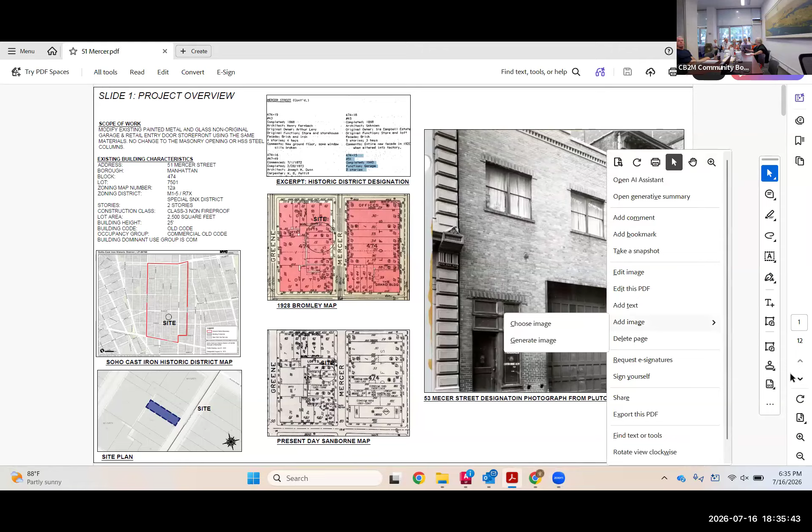Okay, well this is the present day building, right? So it's still a two-story masonry building. Everything's the same, masonry openings are the same. It used to be off-white. Before that it was Montauk Sofa. During the two time periods, quite some time, maybe they were there in about 2004.

Excuse me, as we're going forward, this is unusual. You showed the designation picture and then the present was different. Was there an approved alteration in the meantime? Yes. Okay, let me bring that up.

Let me go around a little bit since you asked, okay? Let's go a little bit into the history. It was a 5-story building, okay? And then there was a fire. Even in the photos, the fire is taking place. It was replaced by a 2-story garage type building. There's some of these typical ones left at the end of the presentation, I'll show you.

You can see all the way on the right, the top row, Montauk Sofa, an altered garage door with glass in between - presumably some part of the old garage door and some sort of infill, like an aluminum infill door, a retail door in the garage, in the midst of the garage door.

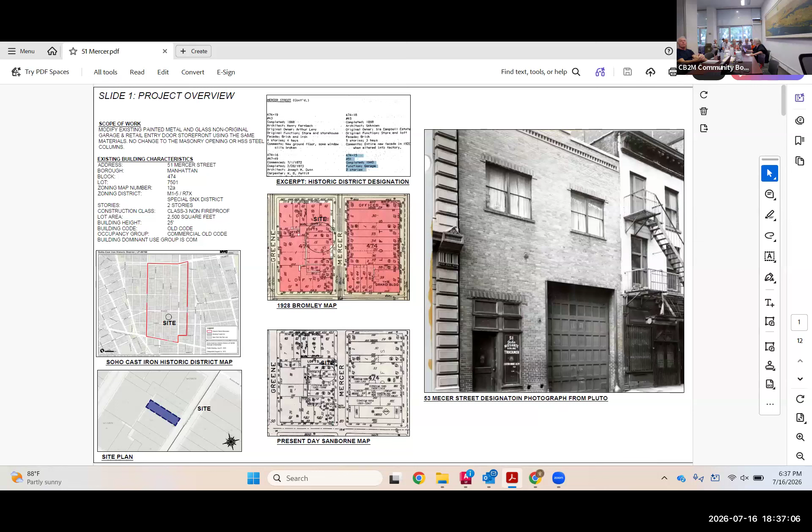Okay, this just graphically shows the progression all the way back to that designation photo on the left, in plan and in elevation. You can see the original designation elevation with the true garage door and the separate entry to the same space. Then you can see there's some sort of change, maybe the conversion of the second floor, and that door on the left turning into the second floor access.

A door put into the garage door that's modified with glass. Then there's the change to when it was either Montauk Sofa or off-white, where it became a steel and metal black glass garage door with a separate aluminum door on the left side here and a transom panel made out of aluminum. And that brings us to - can I go to the drawing all the way on the right?

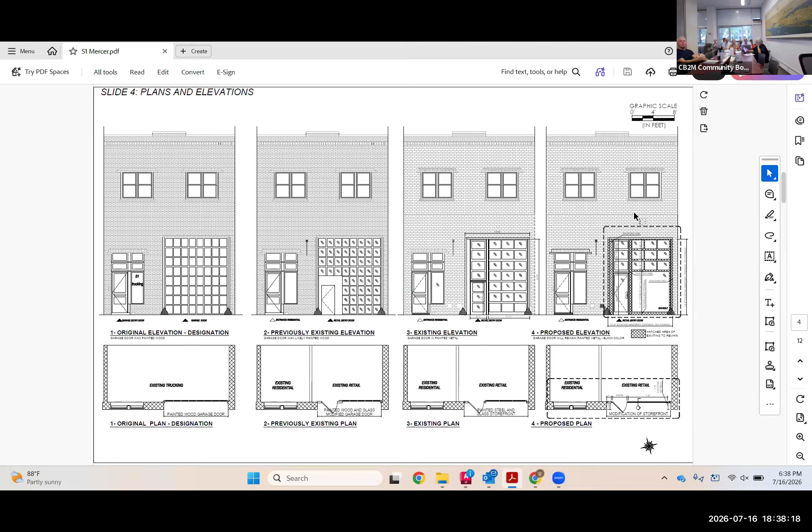That's the current proposal. So the current proposal is more of a modification of the storefront in between some of the pieces that will remain. So it's really not a replacement, and I want to highlight that.

I'm going to just zoom in so everybody can see it really clearly. I'd love to hide these tools. I'm trying to go, okay.

So the areas that I have designated with this crosshatch are areas of existing to remain. What are these vertical pieces? They're steel columns, okay. And then this rectangle is a big steel door.

What I want to do between the two steel columns on the left is take out the transom that exists and the door, and make a new transom door configuration.

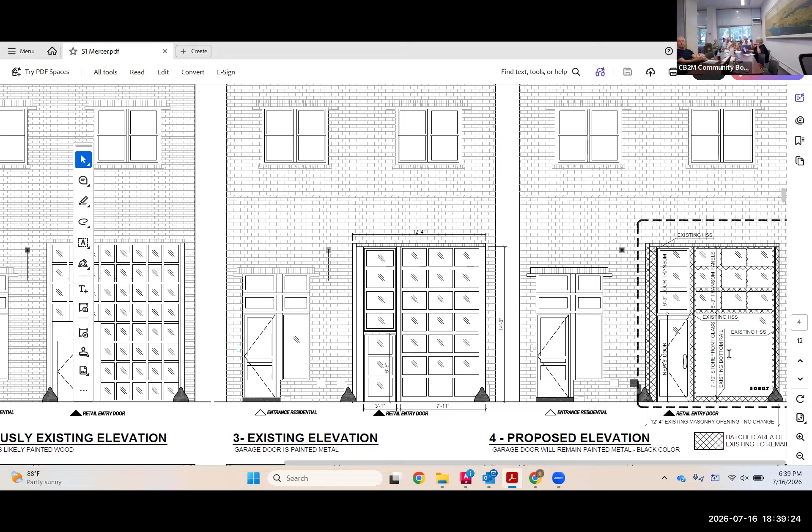And what I want to do to the garage door on the right is modify the garage door to make a store window transom kind of design orientation. So instead of this, let's say, 24 window panel storefront, I want to do a 12 panel over 2 panel storefront, which isn't so atypical in the district.

As you can see, in the detail through the transom and door part, I'm making fewer glass panels, a taller door. And on the garage we're doing the same - fewer glass panels, but it's more like one big panel over a multi-light transom. That's something I have above the door, and that's something I have above the garage door. The garage door is staying, it's just being modified, okay.

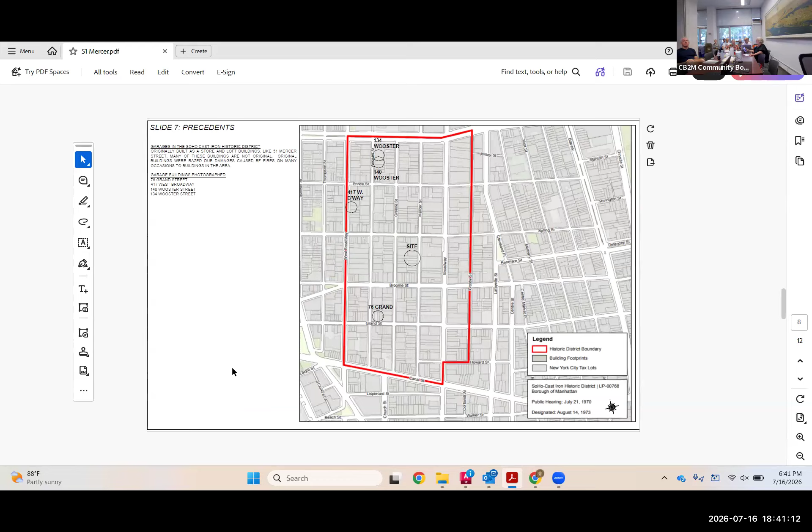I've got four examples of other garages that have a similar history. This is the Deitch Gallery around the corner on 76 Grand Street. It's actually pretty unchanged, so there's a lot of examples of things that are unchanged and things that are drastically changed. This is one that's pretty unchanged.

Okay, if you would leave up the one that shows before and after as a rendering, I think that's best for us. Okay, let me do that.

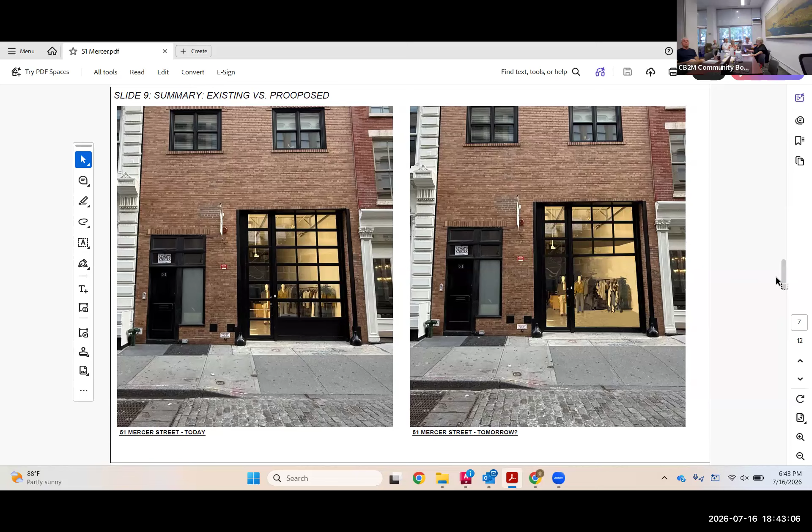Yes, the type I was showing was a 1-story garage type building, not having to do necessarily with the storefront. I was starting with the typology of the garage. Okay, that's fine. Thank you.

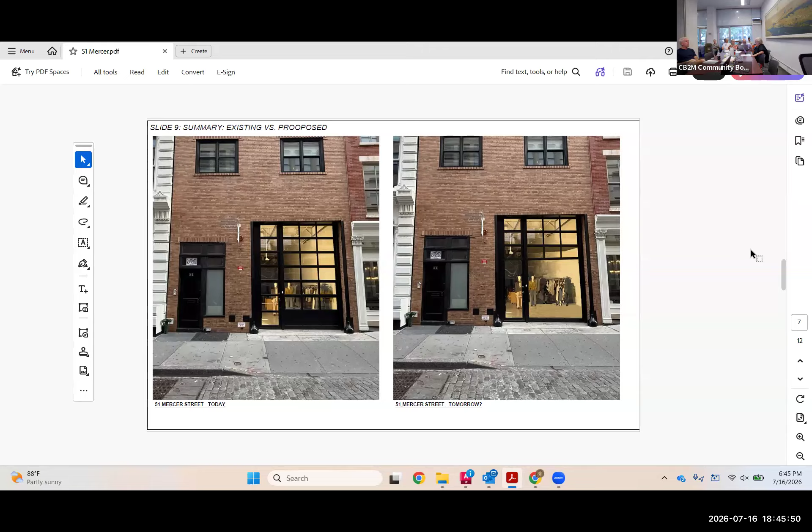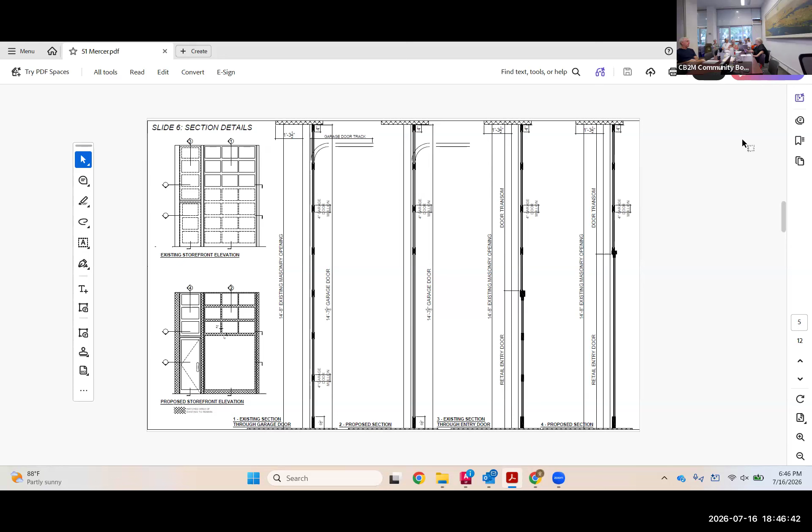I'm torn. I think it could, for example, maybe what might improve is if somehow the transom was expressed better. In other words, you're having a door, a picture window, and a transom, but the transom doesn't show any delineation, like a heavier member. Also, I find that the relationship to the existing door, which the other examples don't have, is lost. Maybe there's a way you could use the same size glass as the one going upstairs, because right now they're two different sizes. They do align where the door is, but that's about it. The size of the glass does not mimic the residential entrance.

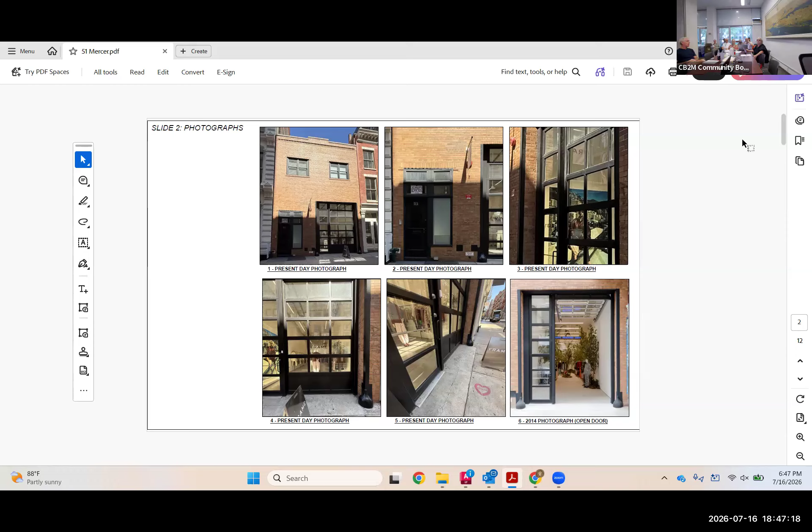Okay, I just want to say we're keeping it a garage door. That's the intention, so it'll always operate like that. It doesn't operate like that currently? Oh, it does currently, here's a picture of it open. That's why I put it, so look. But I also want to say, it's a hinge door? Yeah, let me spend a minute on that. It's actually not like this, it doesn't do the fold-up thing. It goes up at an angle and then stays straight.

And to include your comment about the horizontal, I can do what you said, because I'm taking out everything between, it's just kind of a mistake and I can make it better. These verticals here, I can take everything out and make a stronger alignment. And how would I know it's a garage door? That's the question. It's a mystery.

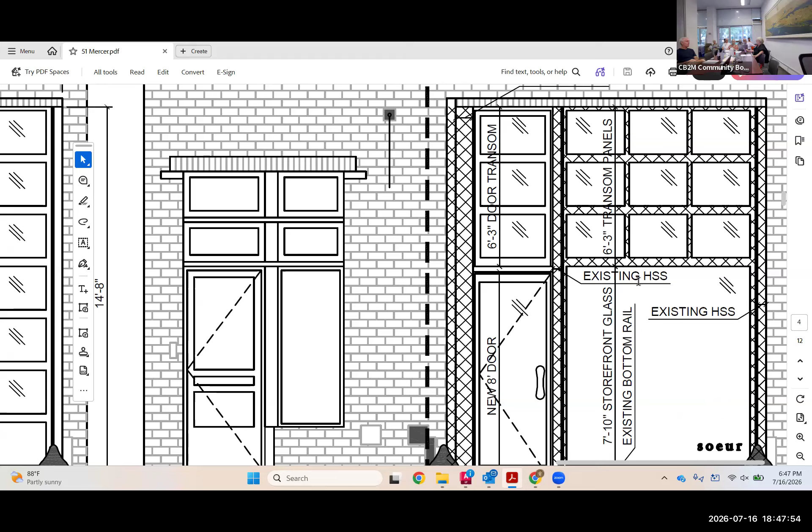It just looks permanent. In this case, we could open it on sunny days because it's a garage door. The door stays in position, the idea is, think of the door as it is right now as one big rectangle divided into 20 pieces. We're going to take out all the divisions and I can put in whatever divisions you want in between that rectangle. What we'd like to evoke is the idea of a transom that's divided above a more open base.

And I think with your comments, that could totally make it in by the end of the month, or if you wanted me to just tighten this up and show it. We're talking, but it's going to be the improvement that I'm going to make inevitably.

So all I'm saying is, let's just try to understand the things now in the executive section. I'm going to jump in and say, I agree with Anita, even though this is a modification, not a replacement, somewhere along the line the idea of garage door gets lost. When we see the existing, it signifies garage door, regardless of its method of operation. It's just a quick boom, garage door, industrial area, commercial past, boom, garage door. That's what we get, right?

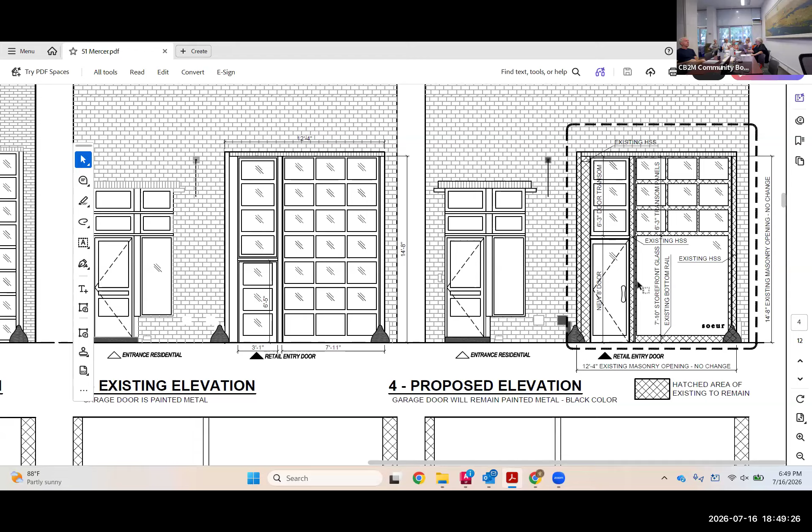In what is presented, although it is a modification, not a replacement, that garage door reference is kind of lost. So I think any way that can be amplified or evoked, tacking onto what Anita just said, would be desirable here, because it actually doesn't evoke garage door. It just looks like an unusual transom, and a regular old retail front.

Yeah, and there's no base, no meat on it if it really is inoperable. Is that even wide enough for a garage door? Not really. So change the proportions of the door? Not changing the roll door, but imagine the door stays completely connected to everything that's mechanical about it.

It will always be operable. My question is, is it open from here to here? No, it's just the right side. Well, today that's an odd proportion.

That doesn't, again, that's just how it is. But I agree, it is odd. Well, right, we're trying to get back to a garage.

Right, but I don't want to step over from modification to takeout mode. Because to do that, we have to take out some of those vertical members that I talked about keeping. You can modify without taking those out. That's your choice. It is my choice, but the idea is to make one choice, whether we're modifying the stuff between the masonry opening and the metal, or ripping it all out.

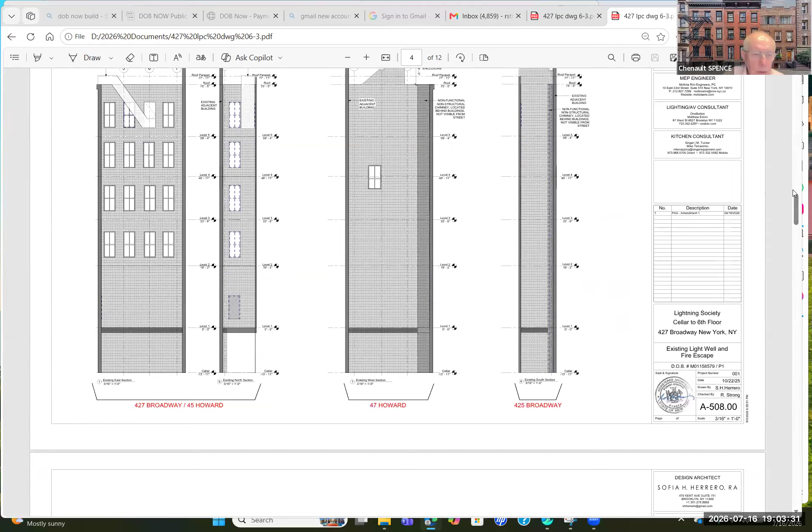And then, what's causing this to need to be done? Well, the building needs a second means of egress. It has a fire escape.

Oh, you're simply improving the building then? Yeah, we're improving the building's viability. There is a fire escape, but it's not a very good fire escape, it's not even a commercial fire escape. And we're interested to know the sort of mechanics of this.

The area where it's being built is vacant at the moment. Is that correct? Yes, it's an empty space. So only the entrances from the building into this stair structure will need to be constructed.

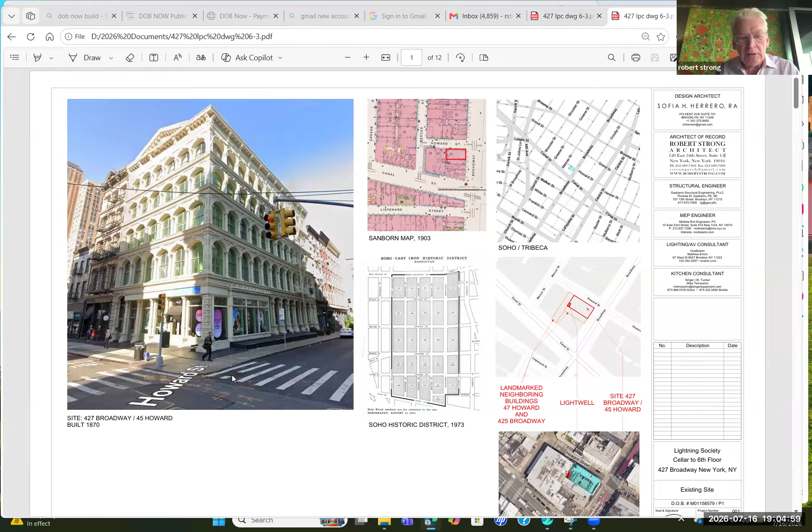There isn't any street access there. You can see my arrow, there's an entrance here. No, I'm talking about, we could go back to whatever best illustrates the stairs. Maybe the drawing, the vertical drawing there. Okay, so there is a lobby that exits onto Howard Street.

No, my question is, from the building, you're going to cut doors in from the building into the stairwell. The doors will be where existing windows are now, and those windows will be enlarged to the floor.

Is this completely supported within the building? Does it touch any neighboring buildings or anything? No, it doesn't touch the neighboring buildings. There's a 1 inch separation between this structure and the adjacent buildings. The structure of the stair is supported independently from the building. It has its own footings, and the stair structure supports the Rockwall panels that provide the fireproof enclosure.

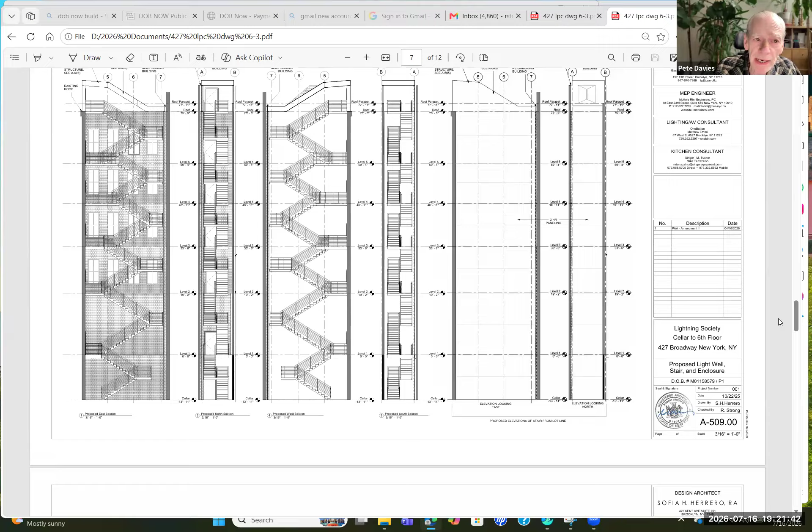One thing I'd like to point out is that the plans you've been presented are dated October 2025, and the photos you're being presented are from October 2025, while Marie's photos were taken this week. So when they say these photos show the current condition of the building, that's not true, because the photos were taken before the unpermitted work was done, which resulted in the stop work order and the loss of professional certification. As Marie said, things are a little slippery here, and clearly there are some sequencing issues.

And we've got a file of letters from other members of the community as well. So perhaps some of the people you expected to be here sent letters instead.

All right, Chenault, would you like me to, do you want to, shall I ask the question? You take care of that, and I'll ask mine. Okay, Susan, I'm just trying to get my notes straight. Susan, yes, Sean? Could I just make a statement now, a correction?

Correction of something the applicant stated. He stated that the buildings in Soho basically have no rear yard extension. That's not true. There's 85 feet of building and generally a 15 foot rear yard, not one inch. We do know that, but thank you for pointing it out.

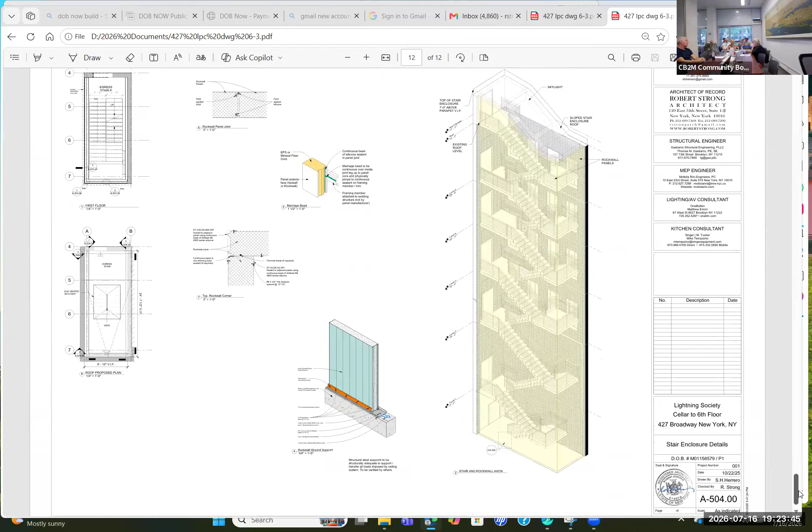All right, well, obviously all of these questions center around the issue of potential damage to neighboring structures, and they deal with two things going on here: utterly inadequate information regarding the structural aspect of things. Obviously we're not engineers, nor is it our job to be, but we can see there are major holes here in terms of the structural parts. So why don't we start with questions regarding the footings, the foundation, how the weight will be carried, whether the soil will be tested, the stability of the soil, and issues having to do with water tables. I think these are huge concerns for both the committee and the public. So, Robert Strong, if you would be kind enough to respond to that.

First of all, the footings are... this is a lightweight steel structure. Steel is much lighter compared to heavy masonry, so we aren't really adding a lot of weight.

There is an entire structural plan. Landmarks did not ask us to include that in the presentation, but there are footings which fall in the center of the yard. They don't touch the adjacent footings, and we don't have to dig down very far.

How far do you have to dig down? I would say only a foot. The footings have to only be about 2 feet deep, depending on soil testing, but it's lightweight, so we don't have a lot of issues with major structural footings, and they don't touch any of the adjacent buildings.

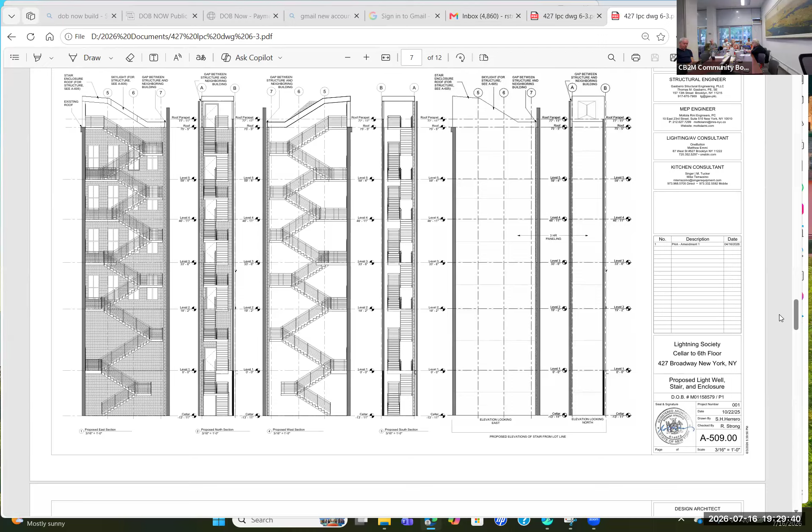Anyway, I think those were substantially the questions that came up in both the letters and in the testimony you heard this evening. So I think we can now move on to see if there are any members of the community board who want to speak who are not on the committee.

I don't see any, so we'll go to the committee. I see Arturo had his hand up. Could I speak first? There's something that questions first, and then I want to correct something from the testimony already, and then we'll do the committee's questions. Okay, go ahead, Chenault, please.

The question of use. If there's no restaurant on the top floor now and a restaurant is being introduced, why is that not a change of use? It is a change of use, but I'm sorry, your testimony before was that there is no change of use. The primary use of the building is not changed, which is office. I'm sorry if that was not expressly stated, but there is a change of use of 2 floors, but the primary use of the upper floors remains office. So there would be a roof and 2 floors that are office designated, and then 2 floors which are changed, but the primary use remains office.

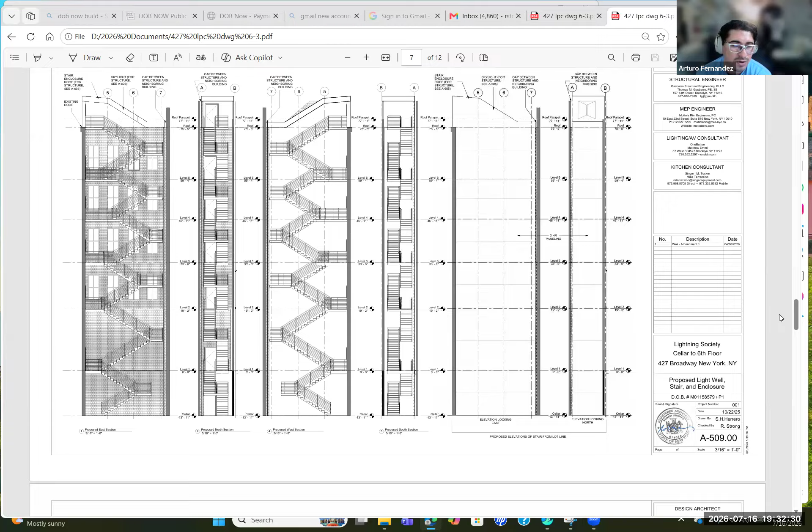On the design of the stairwell, this is probably for Robert. Why did you choose to go with solid steps and landing treads as opposed to bar grating? Because it's an egress stair, so I believe code requires it to be solid. Okay, and so just for clarification, for the committee and everybody listening, is the intention of the stairwell purely for emergency purposes, or is it also to be used as a regular means of egress? For example, will stairwell doors have emergency exit signage and corresponding measures, or is this a stairwell that will be accessible and can be used at any time?

The stairwell is separated from the spaces with emergency exit signs and fire-rated self-closing doors. So it's an emergency exit stair. It's not used as a means of entrance to the spaces. There's an elevator and another stair within the building that exits on Broadway. Okay, thank you. Thanks, Arturo.

Anita? Yes. Is this addition visible from anywhere, the other streets? I'm trying to visualize what this looks like. Do you have a material sample?

It's a rock wool panel, so it's a fire-rated panel filled with rock wool. It's a type of insulation, and then it's a metal panel on the outside that'll have a bronze-coated paint.

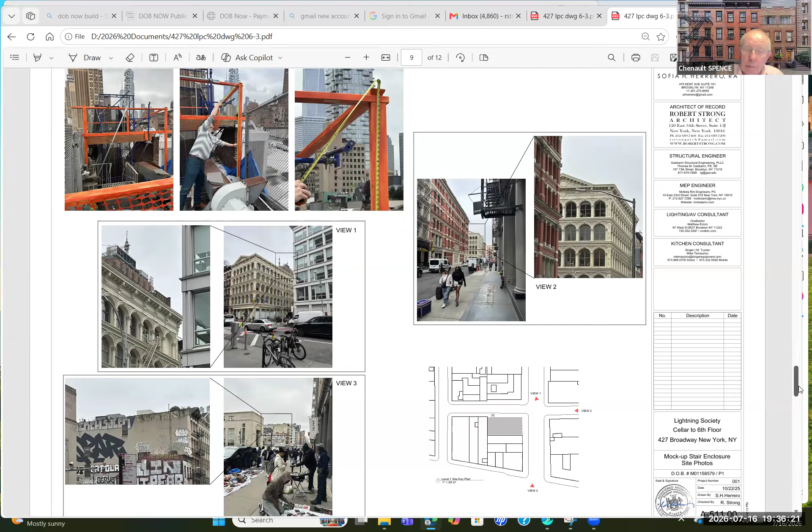All right, Chenault, I think we've asked all our questions. Okay, I'd just like to speak to the public. We are well aware of the problems that you've spoken about, and we begin to see other problems as the presentation has come, and be assured that we will have our usual form to deny unless there are any number of provisions that would need to be met in order for there to be a positive recommendation. Thank you.

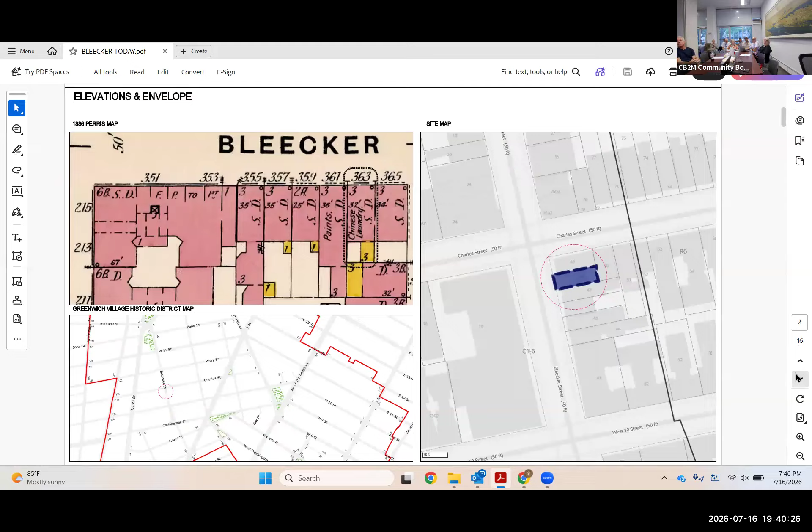It's one building off the corner of Charles Street, a 4-story building covered in stucco with a fire escape. Let me give you a better picture of the building as it is today. We have 16 slides here. Let me show you where exactly the building looks like today.

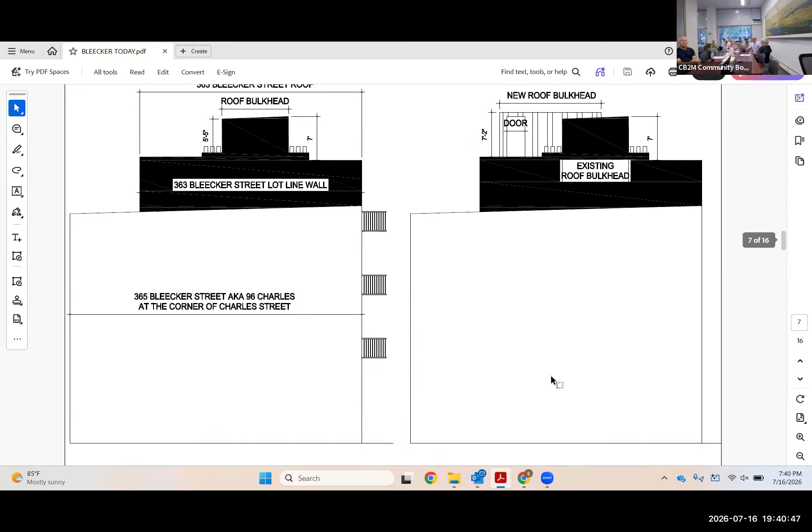I'll tell you the page. Where are we? We'll restart, okay. You see this building because it doesn't look so great. The building on the right is a stuccoed-over building with a fire escape, in beige.

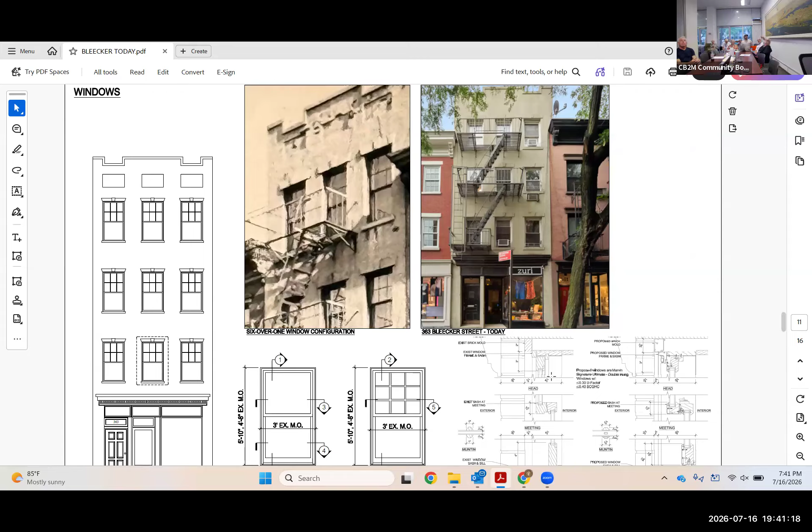I'll pinpoint the picture on the left, because the fire escape's there in the 40s, but it's definitely a labor law fire escape. And you can see that the windows are 6 over 1. We're going to put 6/1 windows back there. Today the windows are 1/1 vinyl — they're garbage, complete garbage. Those are coming out.

So you see the windows from the 2nd, 3rd, and 4th floor. They're 1 pane over 1 pane. In the 1940s, the building had 6 panes over 1, and since that's special, we don't see it a lot, we want to put that back. We want to take this building back to its most significant historical period.

And that's basically the early 20th century — you could call it 1920, 1930, or 40. It's not exactly as we saw in the 40s photograph; it was probably a little different than that, but that's what we're trying to take this building back to. That's the parts of the building you can see from the street on Bleecker Street.

So not up for a public hearing is the removal of this fire escape — that comes off. The front door you see down there has a weird configuration, 2 panels. We're going to change that to a 6-panel solid door with a transom — something traditional, but a little more secure looking for the residential entry.

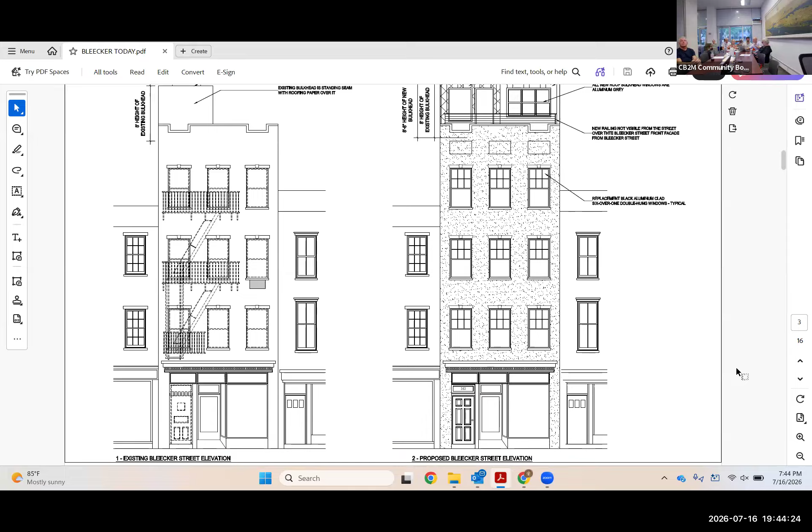So I'm going to just move on. I guess there's a little bit of a delay, so let me expect that. We're going to dig into this rooftop.

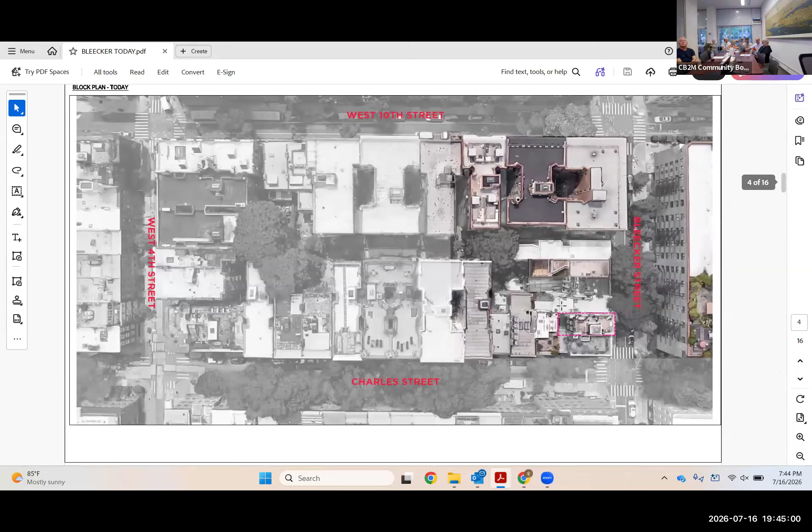Why? Because Corey, who I'm lucky to know, is the owner, operator, and preservationist of this building, and he wants to have this roof. Why is he doing all this? To be able to have access to the roof—not to throw huge parties for 190 people, but to get access to his mechanical equipment in the back, and to have a place to sunbathe.

That's what they all say. The footprint of this building is about... what's the footprint? 17 by 35. The entire footprint is 17 by 35? Is that a joke? No, this is a tiny little building. Yeah, I know. I didn't know that either, because I met Corey yesterday, and I just fell in love with this project.

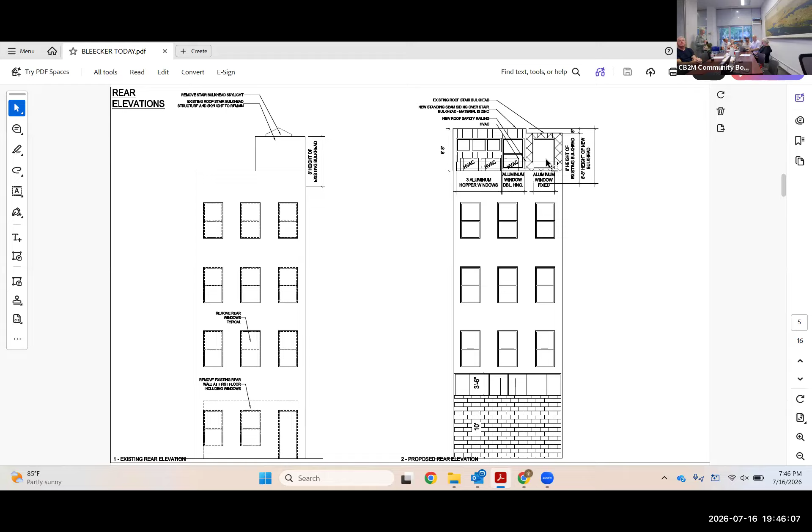Okay, let's take it to the next slide. This is an important one. At the first floor, it's a commercial space, an existing commercial space. It's not built full. How big is that court? 12 by 17—a 12 by 17 rear yard.

Well, we're a corner lot, so zoning allows, of course, for that to be built full. Corey wants to build it full to give his amazing tenant a little more square footage, hoping they'll sign a new 30-year lease. You cannot see this area from the street, and it's completely in keeping with what anybody would do in the district. If you could see it, you guys will be the judge of it.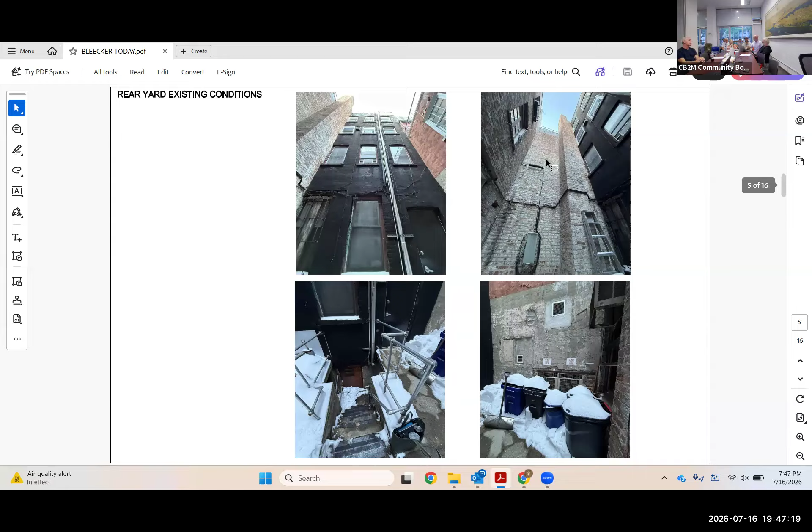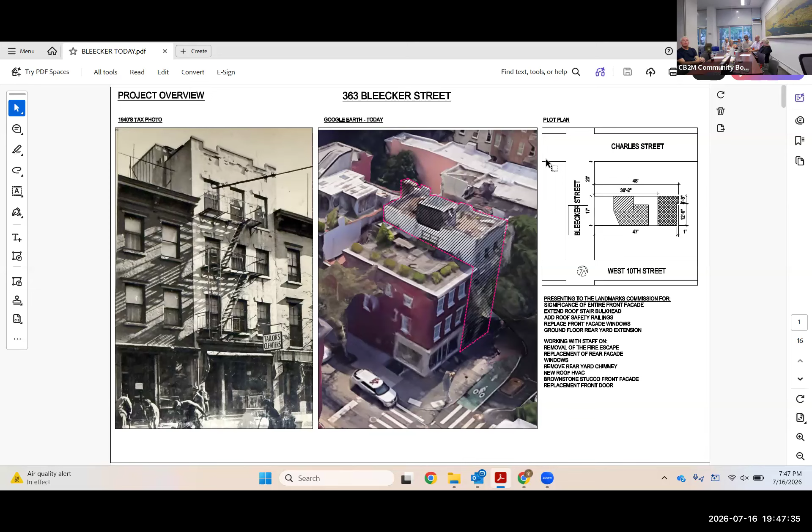Excuse me, Jason, but that's not part of this application. It is. Oh, okay, our drawings don't match your drawings. Could we take a moment here to state what is added to the application that we don't have? We'll go right to the first page—I have what's at staff level written. Well, you don't have ours. Okay, more information. Let's see what's on your first page. I see, this is maybe a month old, and I definitely sent later stuff. I'm not even seeing any of those things. Let's go to the first page, what it is, okay?

It's not gonna be controversial, guys, don't worry. Corey wouldn't do that to me.

Okay, just a moment, please. The rear yard addition is certainly something that requires public review. I'm gonna outline everything that's for public review and for not, it's listed on the screen right now, and I will list it slowly, and then you can ask any question about it. I'll take a screenshot, it's okay.

Okay, well, should we just go over it quickly? Can everyone see it? Is there any questions of what we're here for? We're here for everything, ask any questions you want about any of this.

We have a very specific description of the work, so if it's changing - it isn't changing, it isn't. In my experience, the building, the ground floor would not require landmarks approval. It's allowable, but I don't know, do you have that on your list?

It is, yeah, it is actually not allowable by the law of landmarks, and I'll tell you why. There's something called the adding on effect. You can't just say, I want to do this and this and this. We're already here for two things. Once you go over that, it has to go to a public hearing.

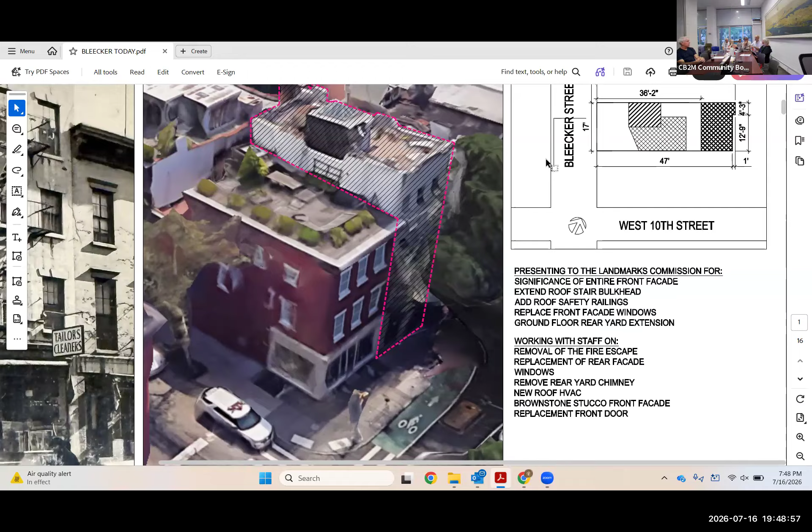But we're here to talk about any of this - this building we're looking at. Well, we don't see the addition, so let's confine the presentation to the things that are before us. Okay, it's just become impossibly confusing. Chanel, can I have a question?

There are significant materials in the presentation by the presenter that we don't have access to, that are being shown to us for the first time right now. I'm a little uncomfortable reviewing this application without having this presentation. There's a lot of diagrams and designs and examples that are not the materials that were presented on the website.

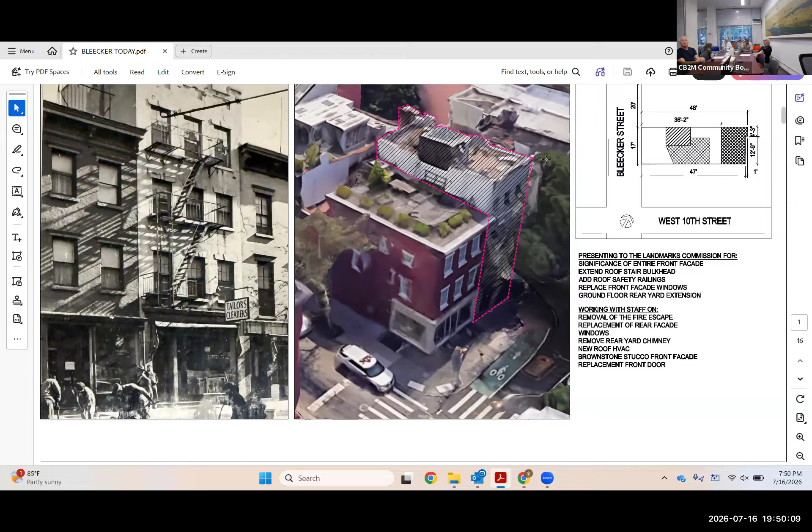I mean, we have been emailing Florence like 50 times. But listen, you guys are the bosses, I'm not here, let's not have a back and forth about that. Finish the presentation, and if we feel that it's deficient to the point that we can't make a decision, we'll ask that you come back. So let's just finish. Just follow what he said.

Okay, so I was just talking about the horizontal extension, which you can only see from space, you cannot see it from anywhere. But I think the best thing would be to just zoom right in on the roof bulkhead - is that what everybody's most interested in? Let's look at a three-dimensional version of that. So here at the bottom right, you can see the hatched pattern on the first floor showing the 12 by 17 horizontal extension, which you cannot see from anywhere.

And then on the top, you can see this rectangle, which is truncated in the front. You might ask why would you truncate it in the front - the reason is because we didn't want any visibility of this new rectangle, this new part of the mechanical bulkhead over the front facade from Bleecker Street. That's a standard which people hold preservationists to. By truncating it on the right side, you don't see it from Bleecker Street when you're in front of the building. So if we would be so honored to have this approved, you would not see any part of the top that I show as a hatch from the street.

Now, as you go what we're calling south on Bleecker Street, which would be lower numbers, you already see - and we'll show you this in our mock-up photos - you already see the existing bulkhead. And as you go south, we will demonstrate that you will see, in addition to that, this kind of new rectangle, but it's going to look exactly like the old rectangle.

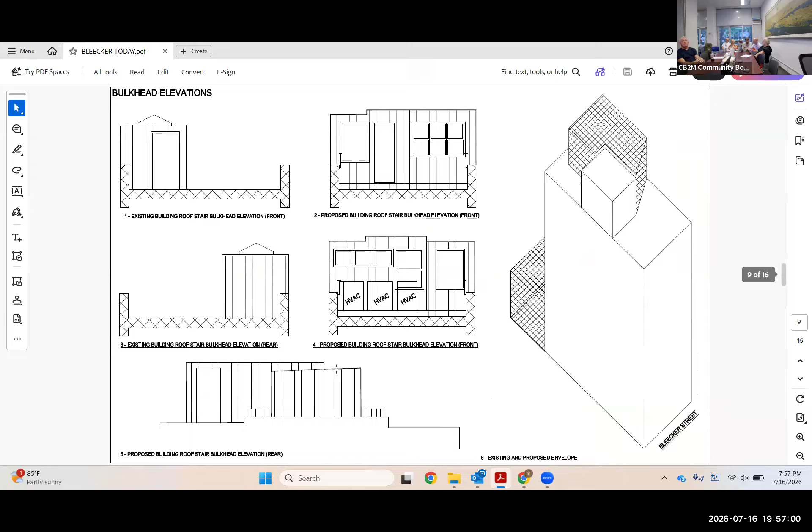Can we see any information about the railing? Yeah, I have tons of information. First of all, let's start with this photo. It's not visible from this view, period, it's set back. This is something someone taught me a long time ago, actually my mentor, and I'll show you the detail, it's a great railing detail. And what the railing does—

We'd just like to see the presentation and the mock-up of the railing. Here's the railing, sir, here's the railing. It's called a canted railing. What it does is it's canted 120 degrees, so you don't see it from the street. And then on the sides, it's not canted. Why?

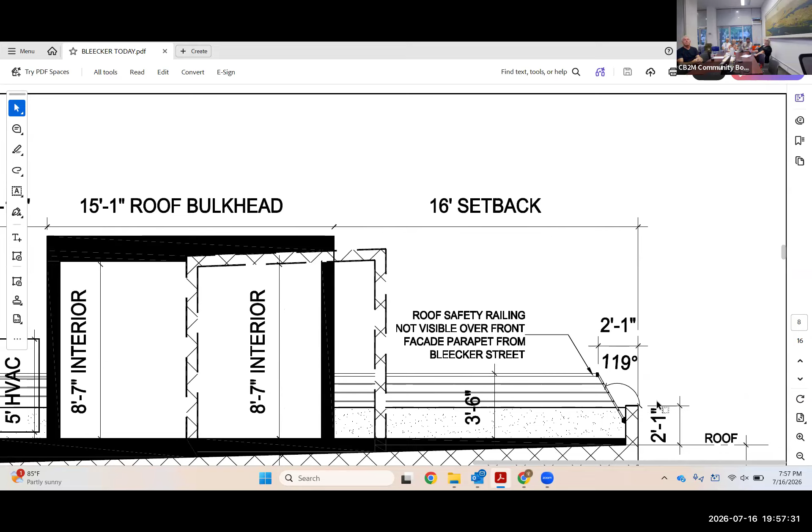Because we need to have a safety railing, and it's going to be a wire railing, a little bit visible, but the building would be safe. Let me zoom out for a second. This is a section of the building with the railing - this is the back, and this is the front. That's why we have this angle, so you don't see it. It says roof safety railing not visible over front facade parapet from Bleecker Street.

Do you have a floor plan? Is there not a mock-up incorporated in the markup? Yes, it is. Everything's mocked up.

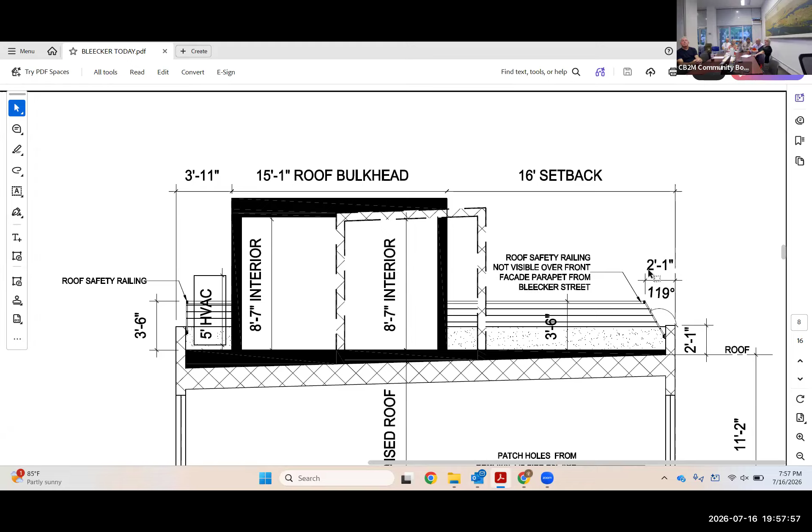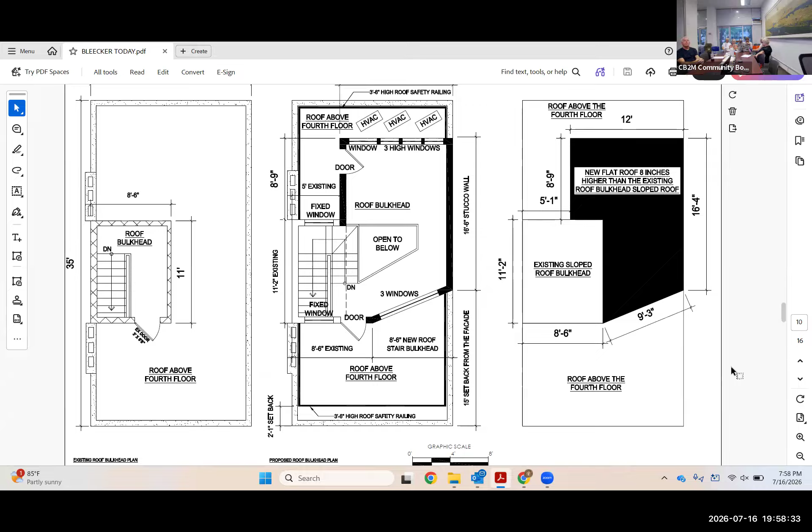We understand. We're asking you about what we don't understand, which is the material for the railing. It's a wire railing with a metal cap. So it's painted - do you have a drawing of that somewhere?

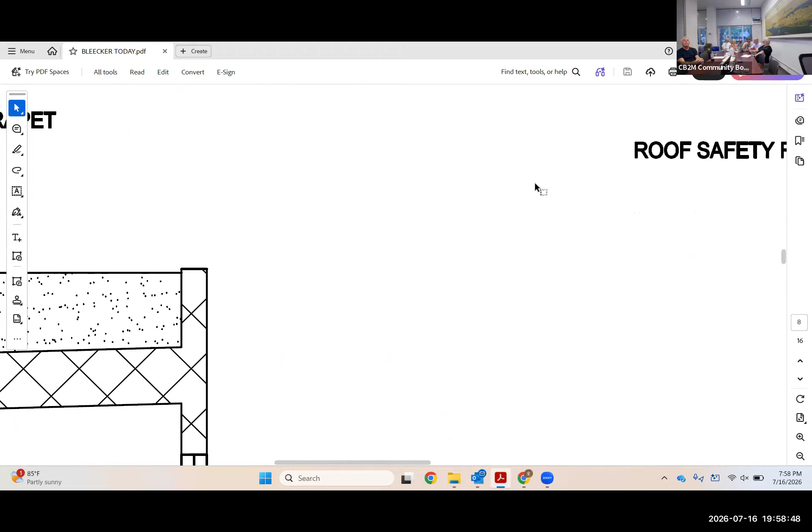Sure, right here, I'll just zoom right in. That's the beauty of the computer. It's pretty much the same in the front, except for the, okay. So it's got this metal bar here, right? Painted black, but you don't see it from the street.

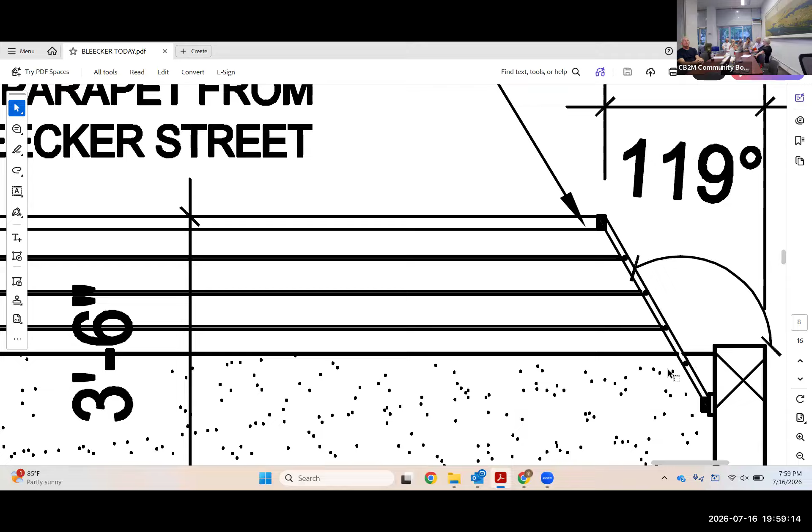And then these are wires, circular wires, less than 1/8 inch diameter, connected to the back side of the parapet. You see this connection? You don't see any of this from the street on Bleecker Street, so it's like it doesn't exist.

Can we please see the mock-up so we can see where it's visible and where it's not? Can you see the mock-up? Show just a picture of the mock-up? No, what you haven't - okay, sure. Oh, you mean the actual up close? I have that on my computer, but I've accentuated it here because you can't see it. It's just mesh - if you zoom in, it's here, and it's up every day.

Find out what you really want. Sorry, I should shut up. That's a good idea - is it that we can't see the railing in a photograph? It's hard with the blazing sun to catch the wooden railing with the blue tape on it, but it's there today, tomorrow.

First of all, we have no orange netting, which is the standard. We do have it. So we have to figure out what we're looking at. It's just up.

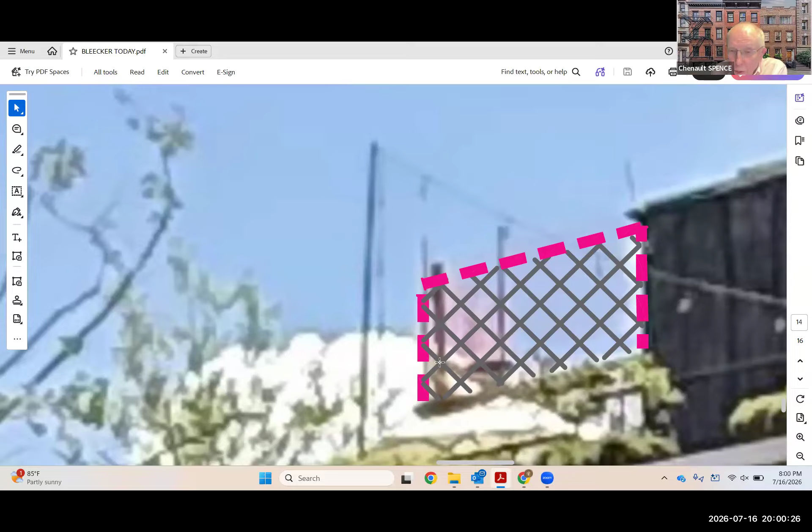Can you please draw the line of the top of the railing with your cursor? Yes, it would be right here. Sorry, I will get it right on there. How about this? You're right - here.

Just a normal height, as low as possible, as long as it's 3'6" from the roof that's there, where we have the mechanical equipment in the back. 3'6" off the roof - we should say at this point, what we're seeing is this new construction behind a 3'6" railing. Yes, sir. Okay, okay.

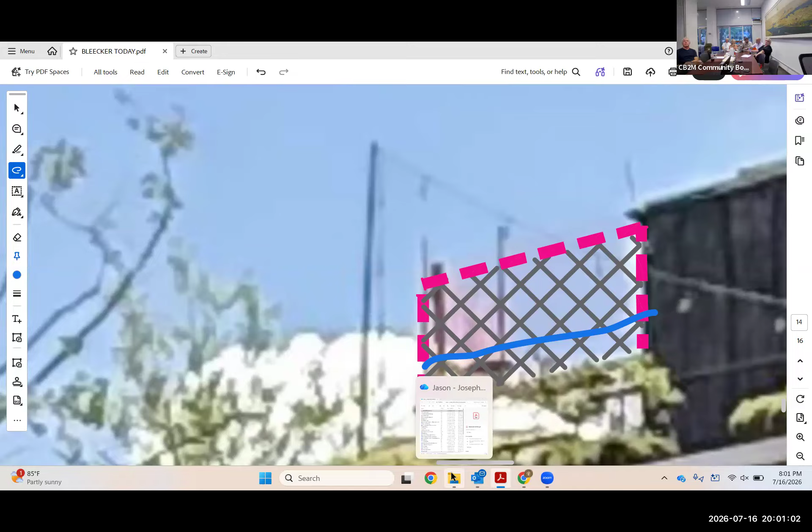Is there more? Move on, please, if there is. No, this is the crux of the project, and the extension of the roof stair bulkhead. We understand what you've said so far, I think. Okay, so I'm going to stop talking. Is there more that you need to say? I hope not - I hope you'll receive it and give us your comments.

Thank you, Susan will move on to the questions. Okay, let's go to the public. Is there anybody here online who has a question or a concern? We'll just double check that. Okay, anybody in the room? No? Okay, anybody here from the board with any questions or comments? Don't see any, so we'll move to the committee.

Chenault, do you have some questions? Any other than what you already asked before? No. All right, Anita. I was just curious how you're handling the fire department access. Okay, so it's a 2-family, right? So we only need one means of egress, and it's a 4-story building because it's existing.

No, I'm talking about the access on the roof. Oh, it's less than 75 feet, so a ladder reaches it from the street, and all you need is that access. The back is a mechanical terrace, and we don't need access to it. And also, you're actually that close to the corner that the ladder can also hit the building.

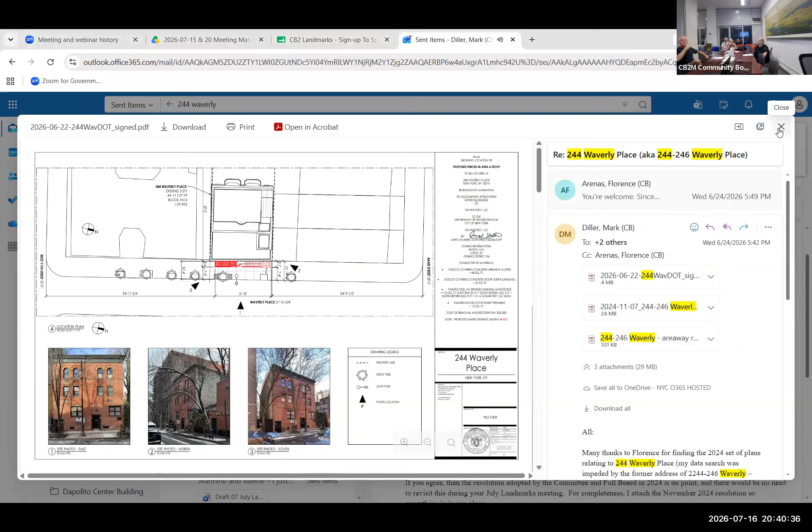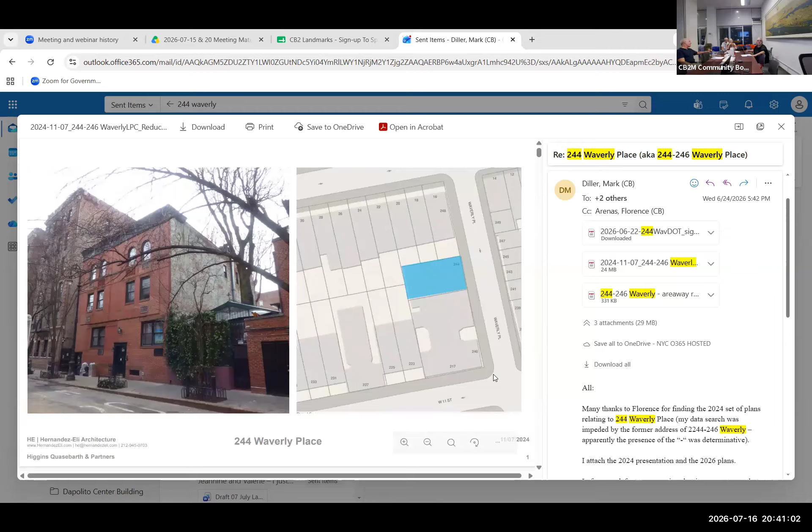Why is that? Because I remember the tree. Remember I said we should require more information about the sidewalks? We need to look at what we wrote. I can revisit it on Monday. I'm happy to revisit on Monday. We can do it on Monday. Why don't we all look at what our previous resolution said and talk about it again on Monday? Sounds good to me.

Is that the application drawing, the one you have? And what I found from the Wednesday, 6/24 record.

I need to step away, I'll be right back. Are you all figuring out things still? No, Chenault, can we revisit this on Monday after we've had a chance to look at what our previous resolution said? Okay, yes, I'll get that. Okay, great, thank you.

Next week, just a preview: the first new building of the two is an approved application that was abandoned after the foundation was put in. This is a completely new building, nothing to do with the other one, to be built on this existing foundation. It's interesting, it's on Mott Street in the Italian section and was described as being reflective of a tenement building, which is very interesting for a new one. It's relatively simple, and the applicant, I talked to the applicant, we think that 45 minutes is going to be adequate. So presumably at 7:15, we can start on the big one, which is Canal Street.